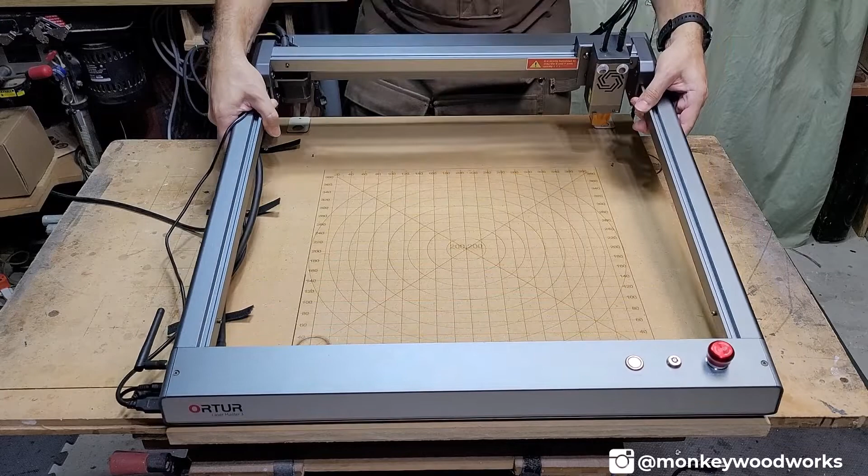And then off to the right here, you'll see I have some Velcro screwed down. That's actually for wire and hose management. So let me put my Laser Master 3 on here. I'm just going to line up the feet to the holes here. And there we go.

So over here off to the right, let me see if I can show you - here is my hose and wire management. I just Velcroed them on here just to keep them from flopping around, just like so. I actually saw another gentleman drill holes in the side of this frame and use zip ties for the wire, but I didn't want to go to that extreme just yet, but I might do that. I don't know.

All right, so I did leave this loose. This is actually an air line, going to an air pump. I did not tie this in at the last point because it has to be able to go all the way up to the front, so you need to keep this loose here.

As you can see, I've already got a grid on here. The grid, I pulled this off of a Facebook group and loaded it into Lightburn, hit start, and it did everything by itself - it worked out perfectly. It's 400 by 400, showing you exactly where the material needs to be at.

I've already messed it up, as you can see. I actually cut a circle and didn't even think about it not having aluminum or something on the base there. So I've already burned a hole in my pretty grid down there at the bottom.

And I'm not sure if you can see this, but I've already added a personality to my Laser Master 3. I gave him some eyes, and yeah, I like to kind of watch him go back and forth.

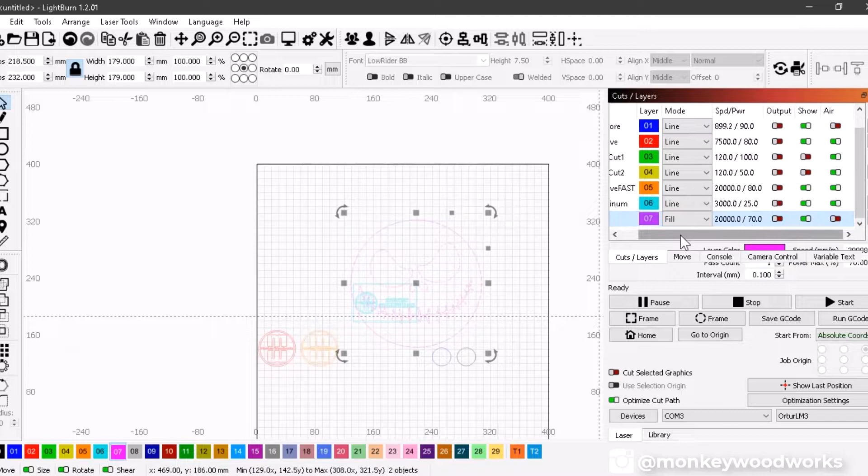All right, so I have my Lightburn file here set up. I am still completely new to this, but I do have some things I want to test out that I have set up. In Lightburn, you can have a ton of different layers, and you can turn individual layers on and off, just by showing them. You can tell it to actually output to the machine or not, and you can tell it to turn the air assist on and off. There's pretty cool features on here.

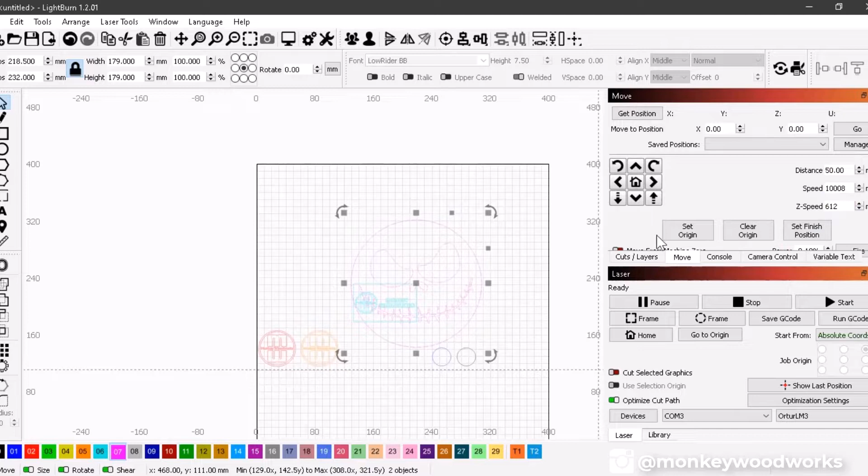You can move the laser around, but let me focus on this part right here, and we're going to go through the motions and test a couple of these things that we have up here.

Okay, so up in Lightburn, I want to turn off everything. What I'm going to try to do is actually engrave on the aluminum first. So what I want to make sure is everything is turned off that I don't want to see, and everything is turned off that I don't want to actually send to the actual engraver.

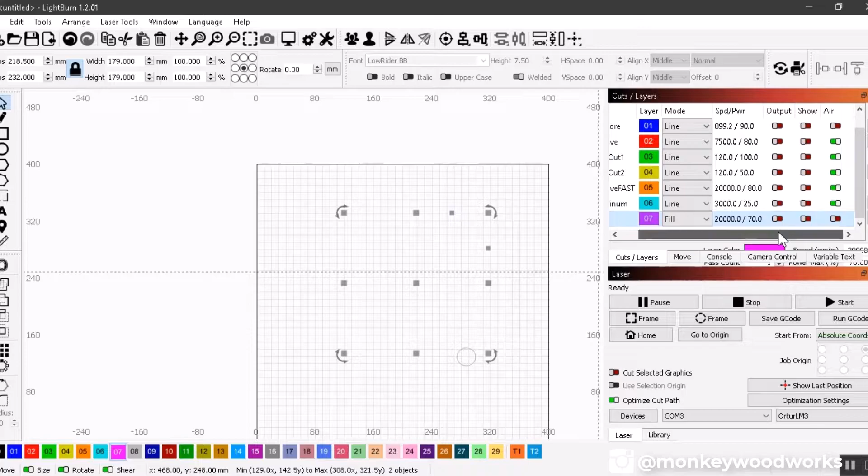All right, so I have my piece of aluminum in here. I have it taped down in the corners because there is a fan blowing from here.

So it's actually going to move this lightweight piece of aluminum. The fan is just to keep the laser cool as it's running. I know I'm not going to engrave up here in the corner, so I went ahead and taped it down like that.

Over here in Lightburn, I had the rectangle drawn, the size of the card. I'm actually going to delete that rectangle when I'm done, but I'm going to use it to do the framing to see if it's actually going to fit in there.

When you frame, you just come over here to frame and press frame. But if you want to slow it down, underneath the move tab, you can control the speed. The lower the number, the slower it goes.

Also, if you need to move the laser head out of the way, you can use this drive button to move it up and down, left and right, send it back to home. The distance that it moves every time you click is controlled by this distance button right here.

So let me do the framing and see if 1,000 millimeters per minute is too fast or too slow. And let's see where that card is.

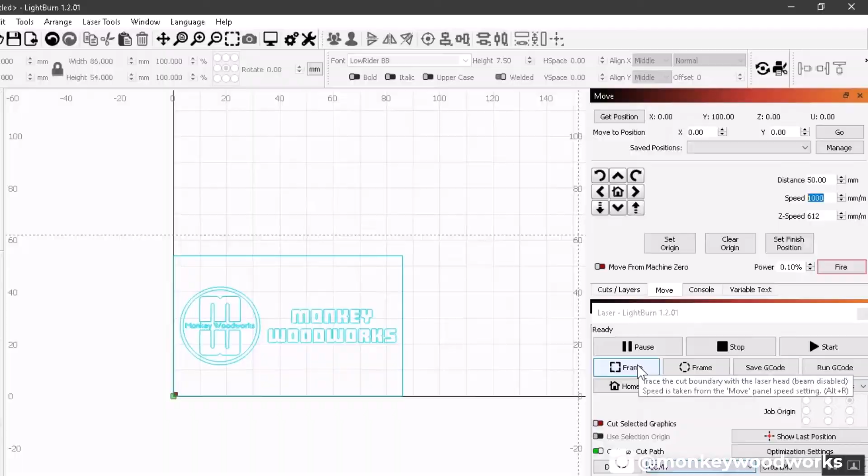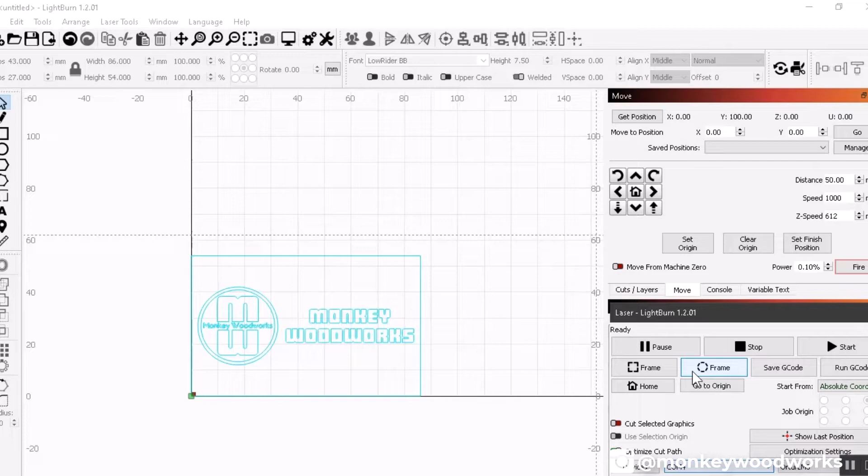All right, so that framing looked really good. I'm going to delete this rectangle. Hit delete. So let's send it to the engraver and see what happens. To start, you just hit the start button.

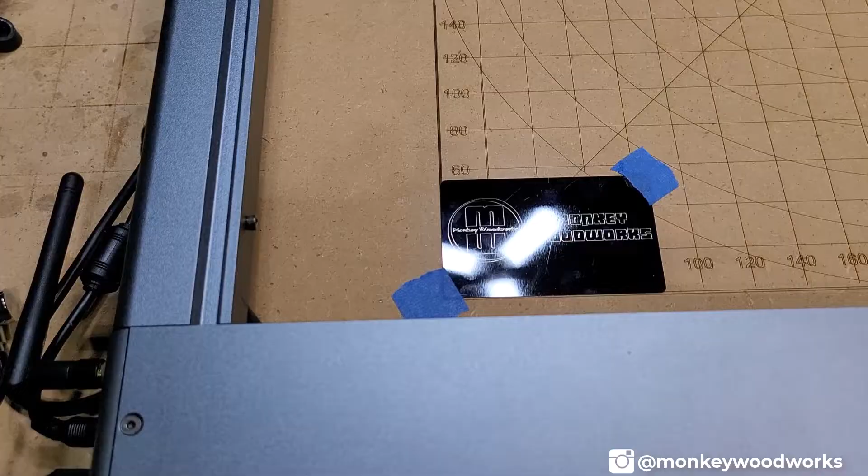Okay, I totally made a mistake. I forgot to tell it to fill instead of drawing a line. Inside Lightburn, I'm going to change it from line to fill, and that should fill in the object. Everything looks okay. Let's start and try it again.

So while that engraves, I'm going to hop over here and prep the next thing. I'm going to engrave on a piece of birch plywood. I use this a lot in my smaller projects, and I'm going to test this in two different ways: one, a normal engraving, and two, as fast as this thing will go. This thing can go up to 20,000 millimeters per minute, which is pretty impressive for a small 10-watt engraver.

Let me get this ready over here on Lightburn, and when this finishes, I'll put this inside my grid and test out the engraving. I didn't center the text very well, but this actually came out really, really good on this test piece of aluminum. Make sure you pick fill instead of line if you want to engrave.

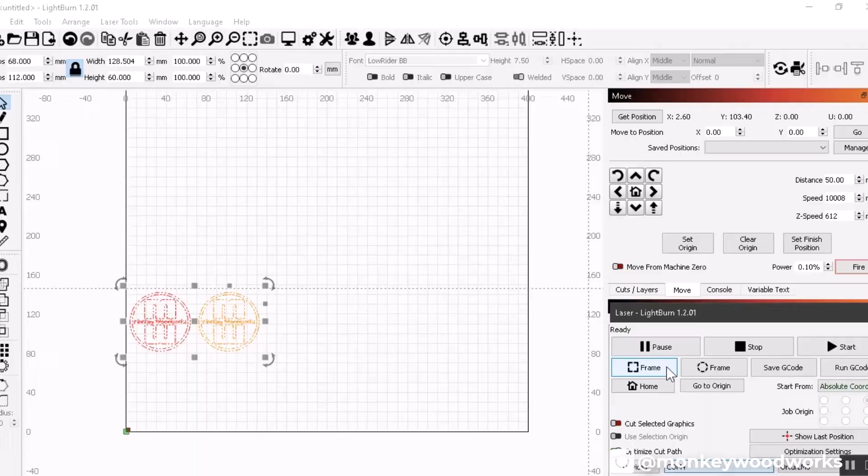So now that I'm ready to go with my plywood here, my 1/4-inch plywood, I'm going to put it in place. I have both layers turned on, outputs turned on, shown is turned on, air assist is turned off. Let's start and see what happens.

While we're waiting on this, I do want to point out that this actually has a lot of smoke coming off of it, especially when it's cutting. They do make enclosures for the Laser Master 3. I don't have one, I can make my own, and I might do that. But you want to make sure you have a well ventilated area, because there's no way to direct this smoke and keep it from filling up a room. Make sure you're in a ventilated area or have a cover with an exhaust fan.

Also, I do want to point out, make sure you wear your goggles. I have these off right now because I'm not actually focused and not looking at the laser. Normally, if I'm in the shop working, I'm going to look down at the laser and keep an eye on it. I'm not doing that now, and I can't even see the laser from here. But I do wear these when I'm in the shop, and I keep them on my little stand that I made there. Looks like we're almost done.

Let's zoom in and see what 20,000 millimeters per minute looks like. Again, that's compared to 7,500 millimeters per minute. Let that thing finish up, and it's going to jump over to 20,000.

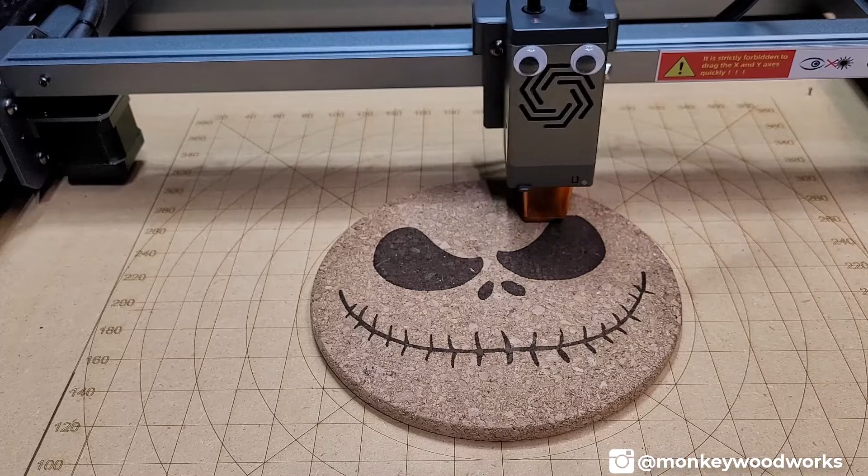So I think Jack came out really well on that cork trivet.

Another thing you can do with this is you don't have to bring the material to it, you could bring this to the material. Earlier today I had to score, in other words draw a line on some boards so I could cut them out on the bandsaw and my jigsaw. Instead of just cutting squares and putting them in here to trace it, I took this off my base and put it on top of my 1/2 inch board. As you can see, it worked really well. I picked it up and put it on there, moved the LaserMaster 3 around to where it fits the board, got in Lightburn, told it to draw a line, drew 3 different objects on there, and was able to cut them out. So it's really handy, not only can you bring material to it, but you can bring this to the material.